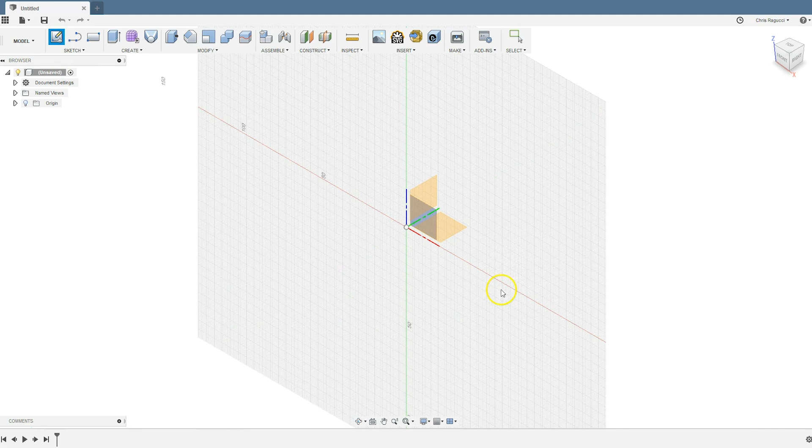Here we are in Fusion 360 once again. We're going to start off like I start everything else, with a sketch. I'm going to click on Create Sketch, and on the XY plane, here we go.

Now I'll show you a tool I haven't shown in this series. I'm going to hit the S key on my keyboard, which brings up my sketch shortcut menu. I've already added things I use frequently, like line, rectangle, circle, center rectangle, patterns, sketch fillets, and points. If you want to add things you use frequently, you can just search for anything if you don't know where it is.

If I wanted to add shell, since that's a feature we're going to use, I just type in shell and add it by clicking this little arrow. Now whenever I hit the S key, it will bring up shell, so I don't have to go up and hit Modify. With me? Okay, here we go.

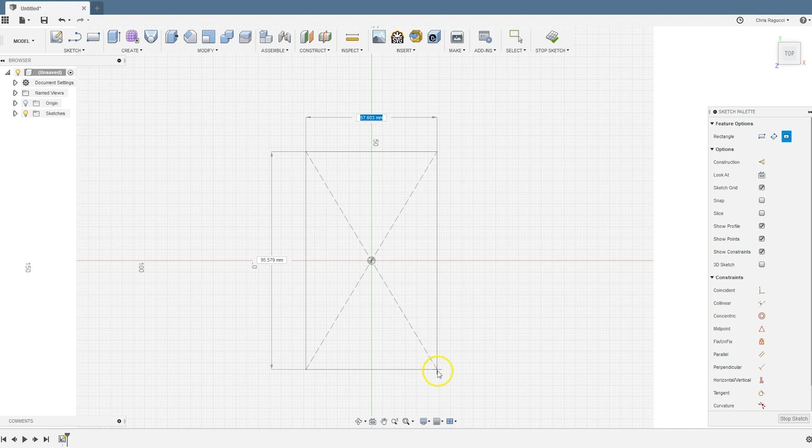First we're going to start with a center rectangle. I'm going to click and drag out, and I want this to be 100 by 150 -- that wasn't a 50, that was a 0. Here we go, now we have a rectangle. Very simply, I'm going to stop the sketch.

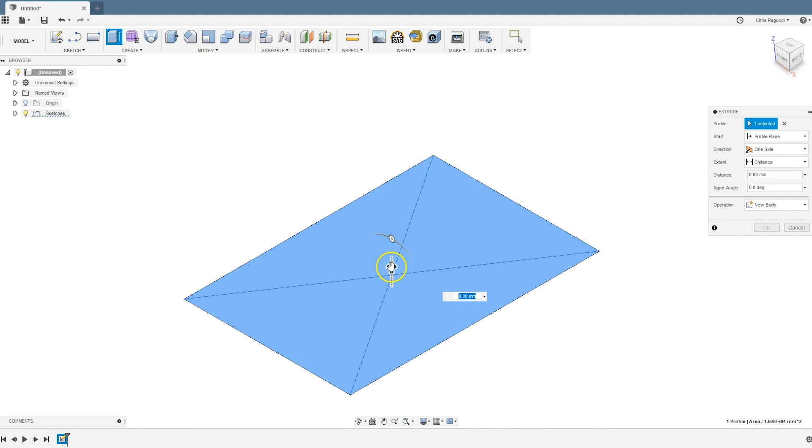Now I'm going to extrude this. I'll hit E, click on the profile, and drag it up. I want this to be 75 millimeters, and hit enter. I'm going to move a little faster since I'm hoping you're getting the hang of it by now. So now this is just the basic shape for our bin.

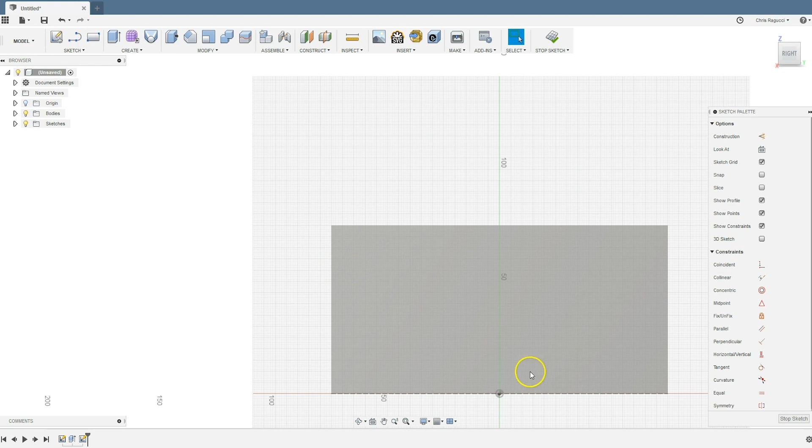What I'm going to do is add another sketch. I'll click on this profile right here and click Add Sketch. First I'm going to project this square or rectangle, so P for project, click on that and hit OK. That's all I need there.

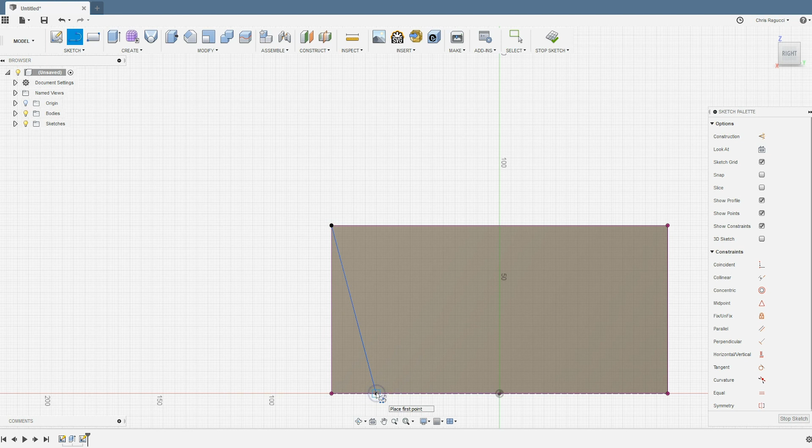And I'm going to draw one more line. L for line. I'll start at this top corner and drag down, and I want this angle to be somewhere around 75. That's fine, hit escape, and I'm done. Now we have two separate profiles. I'm going to stop the sketch and go back to the home view.

So now here's that profile I just created. I'm going to click on it and hit E for extrude. If we wanted to extrude, we'd go this way, but I want to cut, so we're going to go this way. I could just do this and cut all the way through it, but that's not how I want it, because if I decide later to make it wider or thinner, whatever dimension I tell this to be, that's all it would be.

So if I made this cut like this, and then said, geez, I really wanted to make this wider, if I went back and changed the sketch to make it wider, this cut would only be this deep.

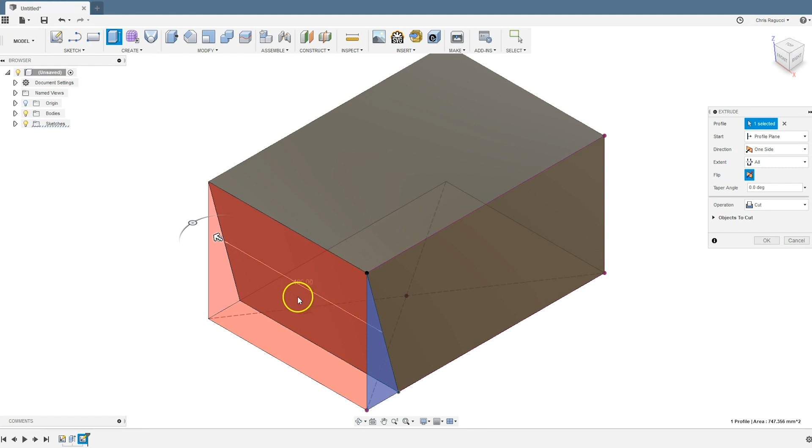So we don't want that. What we're going to do is go up to extent, and instead of changing distance, we're going to hit to all. Now no matter what I do, if I change this first sketch and make it wider or narrower, this will always cut the entire piece. We're good there, so now we can hide that sketch because we don't need it anymore.

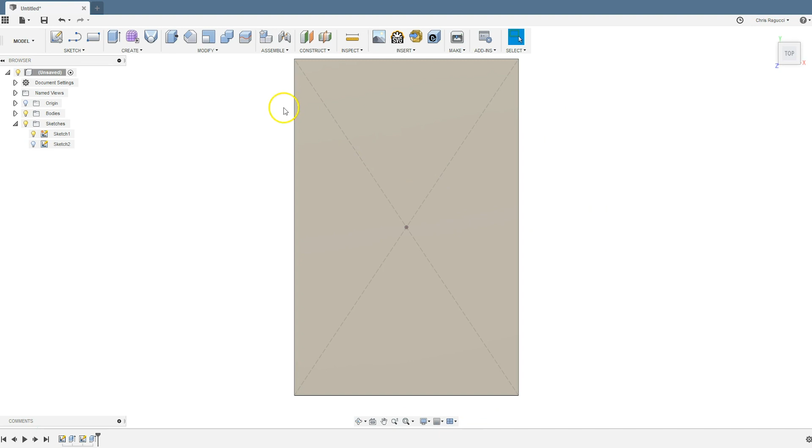Now we're going to use a couple of cool features. I'm going to look at the top here, and I want to use that shell command. Go to modify, shell. I'm going to hit that top face, and this is going to make a shell, and we're going to make that 3 millimeters thick. So now all of these 4 walls and the floor are all 3 millimeters thick. With me so far? Great.

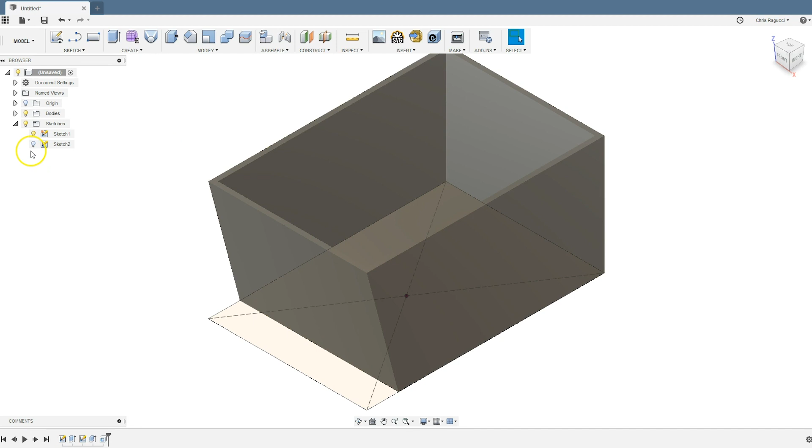Let's keep going. Now I'm going to create another sketch. I'm going to hide this body for a second, and I don't need to see that first sketch anymore, so I'll keep those 2 sketches hidden. I'm going to create a new sketch on that same XY plane, and now bring that body back in.

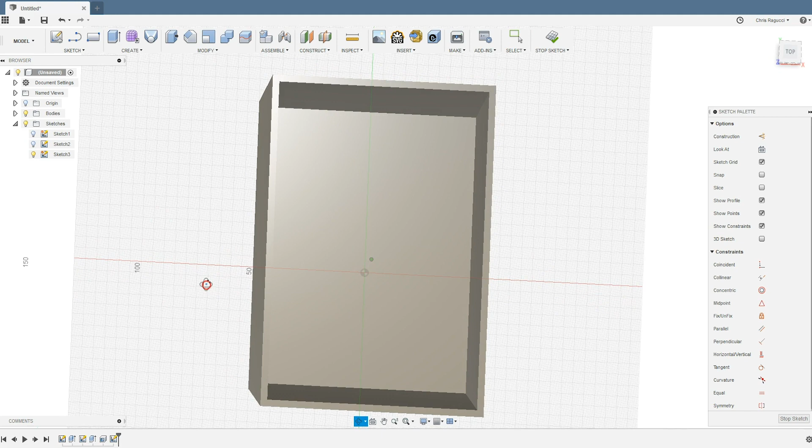I need to project some of these parts, so I'm going to hit P for project. I want this bottom rectangle, and I want these outside lines here. Now you can see we've got those.

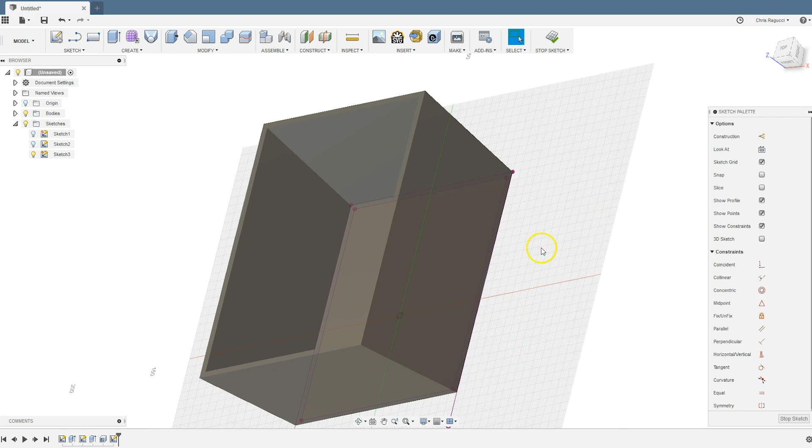Now we're going to have a little bit of fun. I'm going to hide the bodies again, and here's our sketch. The first thing we're going to do is extend these. I'm going to hit S and go to extend, which I use frequently. I'm going to extend this over here, but it's not letting me, so I'm just going to draw a line. L for line, click, drag, click, drag. Now these are closed profiles.

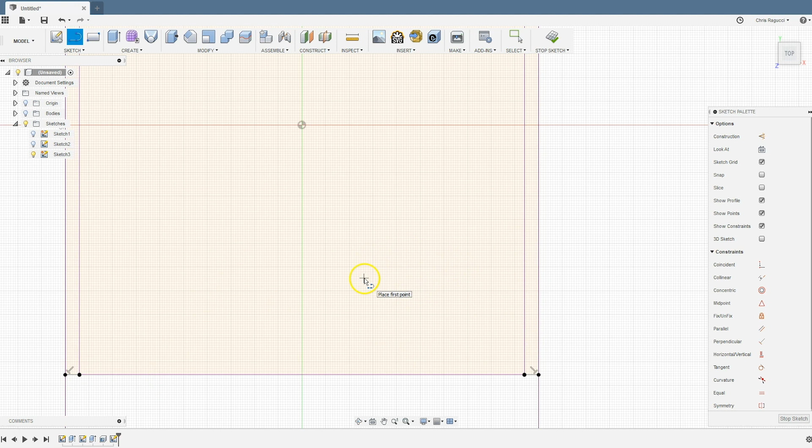Now I'm going to offset these. O for offset. I'm going to click on this, and I want this to be 3 millimeters. I also want to extend these out to that line there. Now I'm going to bring that body back in just so you can kind of see where we're at here. So now we've got that outer line there.

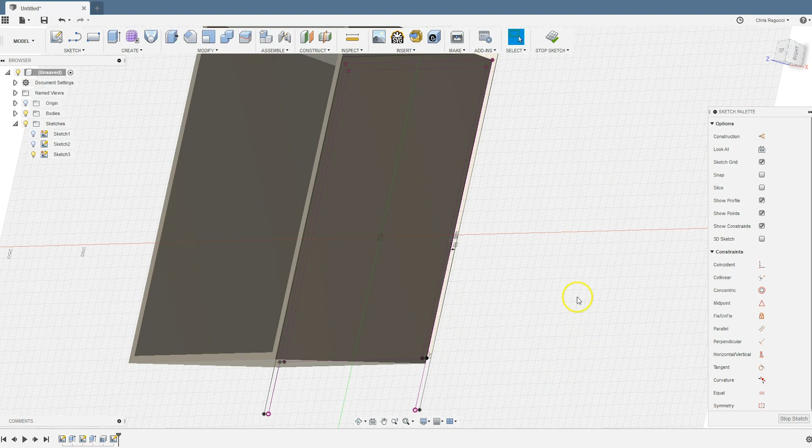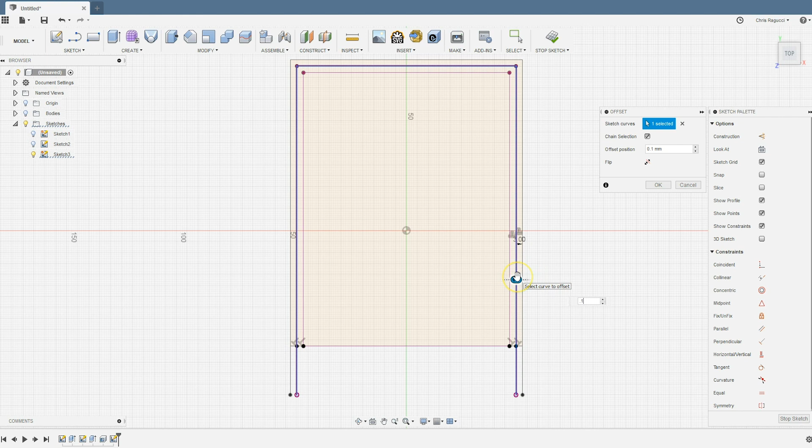Now we've got some tricks that are about to happen. One more thing we need to do is hide that body again. We need to make one more offset, so we need to offset this center one. We only need to offset that 0.1 because this is going to be our tolerance.

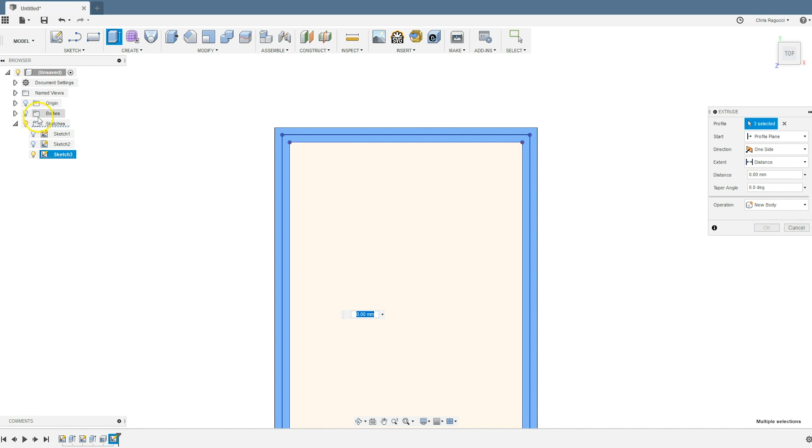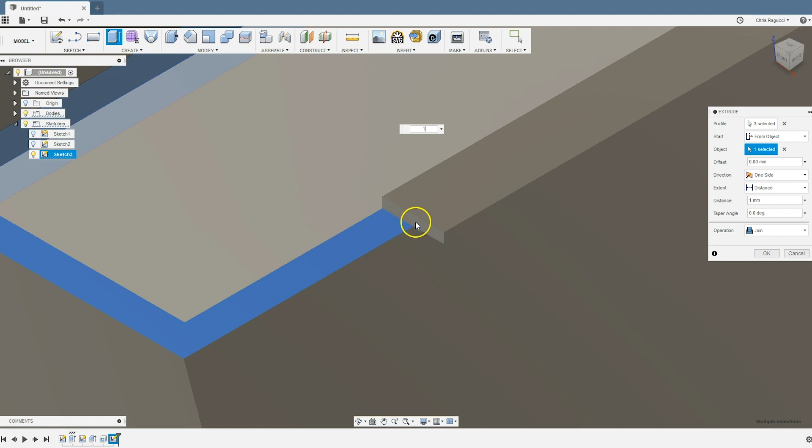Now we're going to stop the sketch and click E for extrude, and click on this center one, and this one. So we now have all of those set up. Now we're going to bring that body back in, and say start from object, and click right here. Now we're going to extrude that just 1 millimeter. You see what that does? That's actually adding a lip from the inner part here going out to the end. That's exactly what we want.

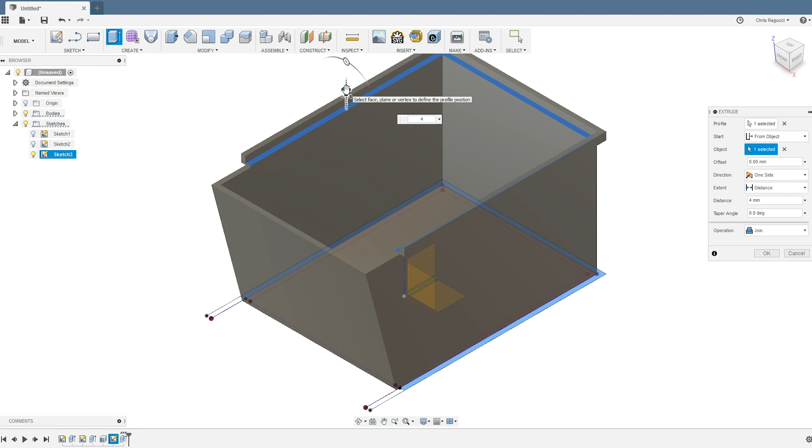Now we're going to hit E for extrude again. We're going to click on just the outer line. Same thing, we're going to start it from an object. We're going to click on this top section here, and extrude that 4 more. So now that's 5 millimeters tall total. What's going to happen is, if you can see what I'm doing here, this is cut out for this corner down here. It doesn't need to go all the way to the end, just right here.

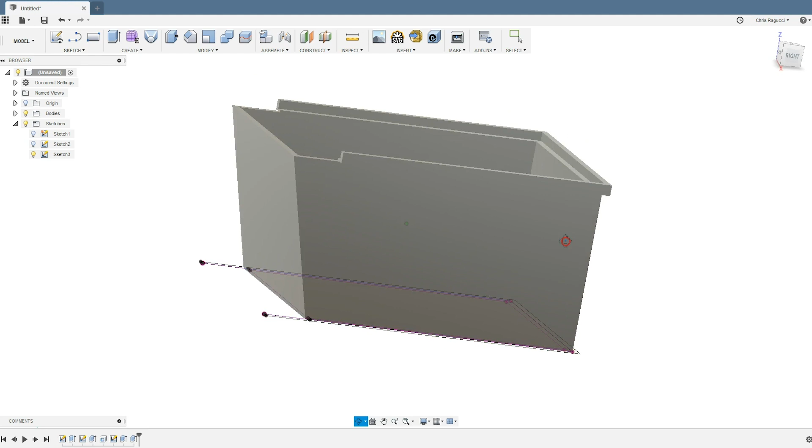Okay, so now this is a very basic stackable bin. Now, you're probably going to want to be able to get your hand in there just a little bit anyway.

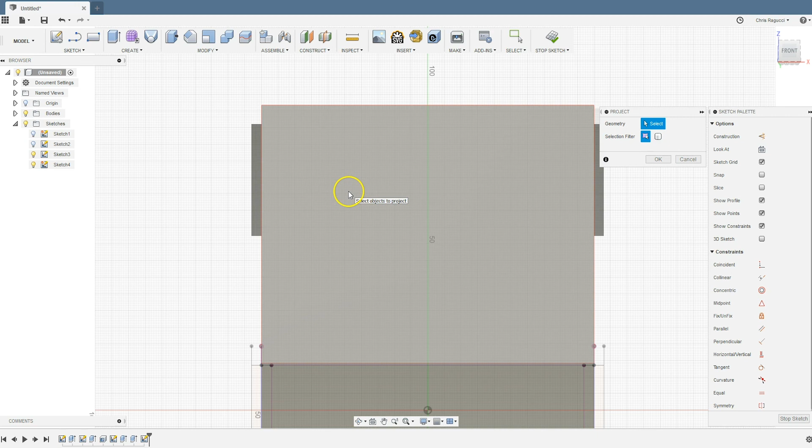So what we're going to do here is create another sketch. I'm going to click create sketch, and click on this profile. You see how it angles me up a little bit. So all I'm really going to do is project, P, and click on this. Now I have the basic face there.

Now I'm going to hit L for line. I'm going to move along here until I get my triangle so I know I'm smack in the middle, and draw a line straight down. Then I'll hit escape, click on that line and click X, or I could click on construction here, either one.

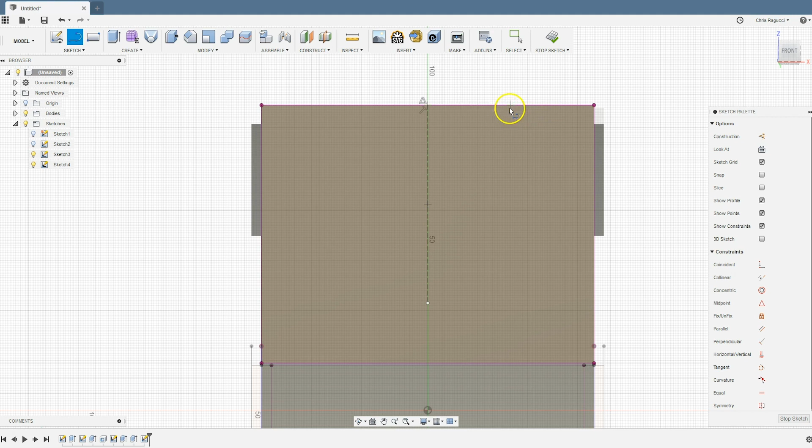Okay, then I'm going to draw a line. Let's say from here, we'll go down around here, and then right over that center. Okay, and that's it. Now we're going to use the mirror function.

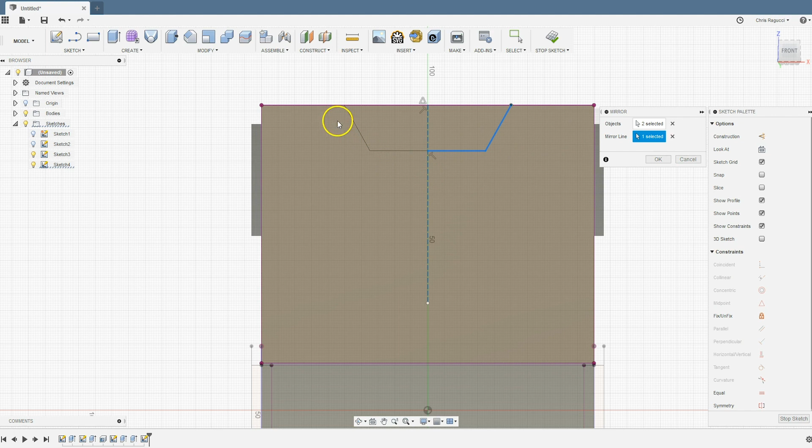So I'm going to click S, and use mirror because I have it in my shortcuts. I'm going to click on this line and this line, and select the mirror line, which is this dotted line, and now it's over there too. Then I'm going to stop the sketch.

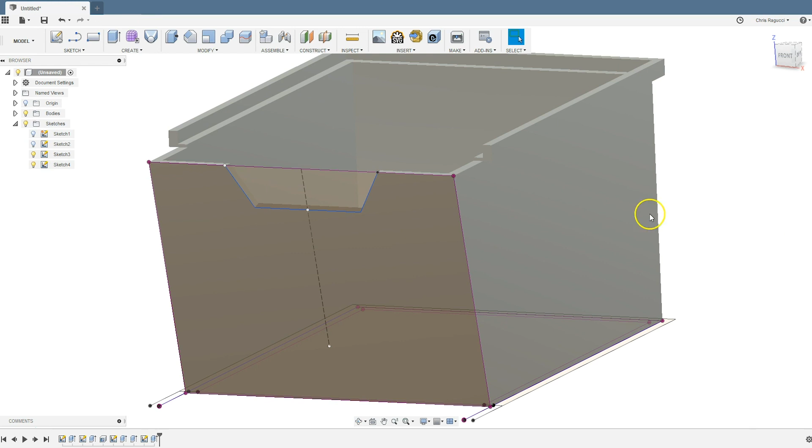Now I'm going to hit extrude, click on that profile, move it back, and I could go all the way back this way if I wanted to, or extend to all. And now that will cut out that whole section. Hide those sketches, and now you can see it.

So we're pausing here for a second because I wanted to tell you about something I may have shown in another video. I don't remember, but I'm going to show you coming up right here—a simple way to strengthen parts like this. We're going to be adding some fillets, and you can follow along in the screencast. But it makes something that could be a little bit weaker if it's not a super thick part.

We only do these at 3 millimeters thick. If you were going to do it at 5 millimeters or even thicker, a centimeter, you wouldn't have to worry about it so much. But in a case like this, where something's small and kind of fragile, you really want to see how you can beef up your inner corners. So I'm going to show you how to do that right now.

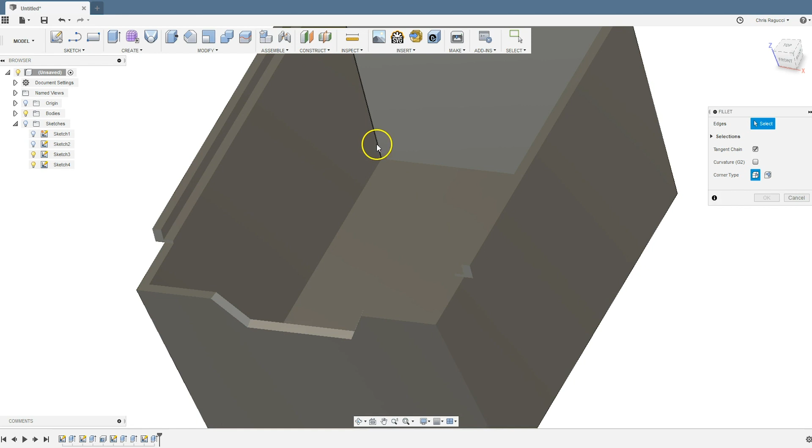So what we're going to do is add some fillets. We're going to hit F for fillet, and click on these interior lines here. Okay, so we want all those.

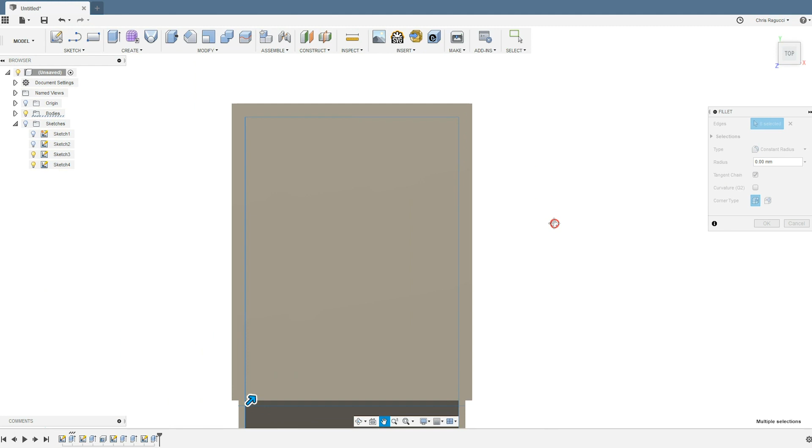Then we are going to move that in, and I'm going to say 3. So you see what that did? It rounded these inner edges, so it's just going to make them a little bit stronger. That's all we want right there.

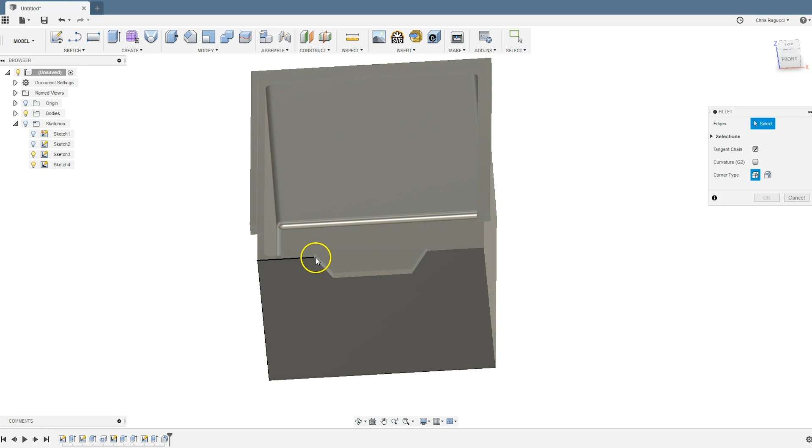And then if we want to do the same thing, F for fillet, we can just add some fillets here to make it a little bit more smooth. And we'll do that there.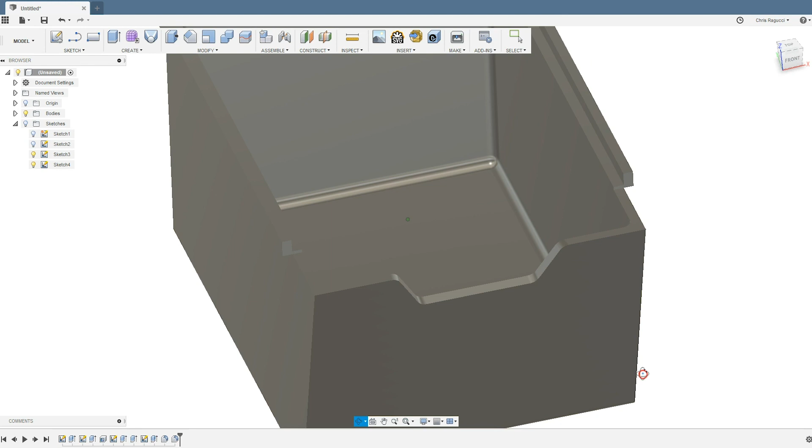And that's really it. So a second box will stack on top of this. It will sit right here in this ridge here, and this fillet here just gives it that little bit of extra space to sit on.

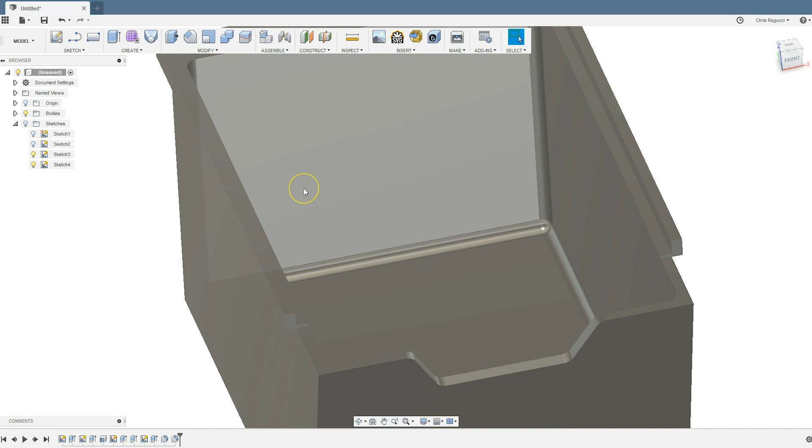So pretty cool, huh? If you wanted to, you could make little supports that go inside here that run up just a little bit on the sides and the back. I don't think it's really necessary for the demonstration, but take it where you want to take it. This is your design, not mine.

So I think we're good to go here. Let's go print it. So I'm going to hit make, click on it, and send it right to Simplify3D.

And today we're going to use Ultra Magnus. Ultra Magnus is a standard CR10 with, what do I have on him? He's got an E3D V6 hot end.

So we're going to center and arrange this. But now, for what we're doing, this is just a demonstration. I'm not going to print this full size. So I'm going to double click and scale this down to, let's say, 70%.

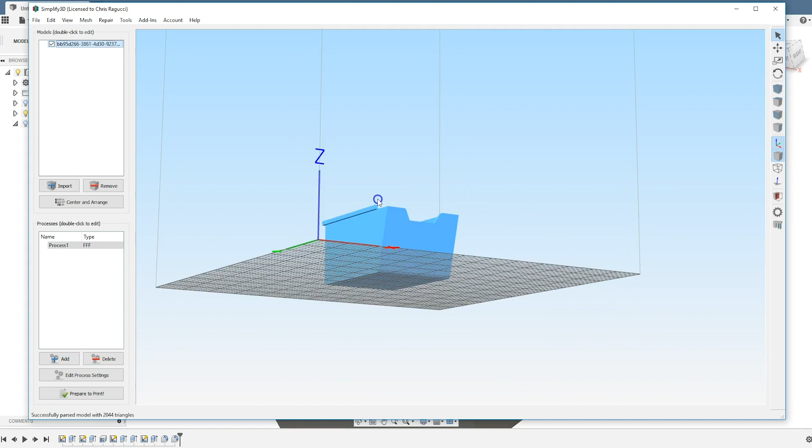Then we're going to add some supports because even on my best day, bridging will not bridge this entire distance. So we need to have some support. I'm just going to click on the support tab and generate some automatic supports. We'll say at 45 degrees, and we'll generate them. Where are they?

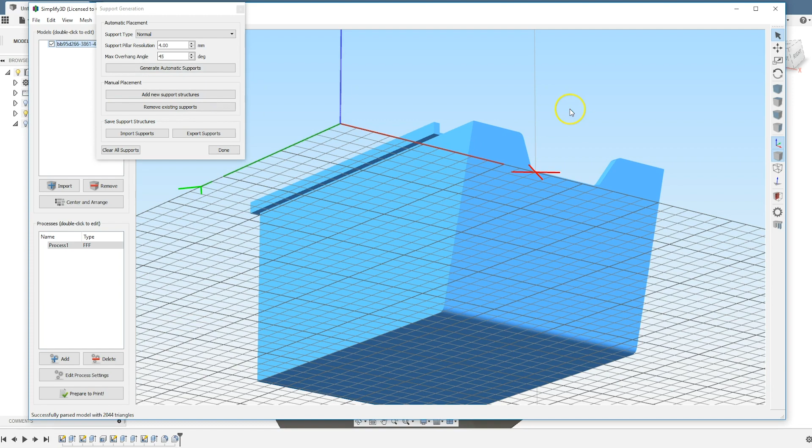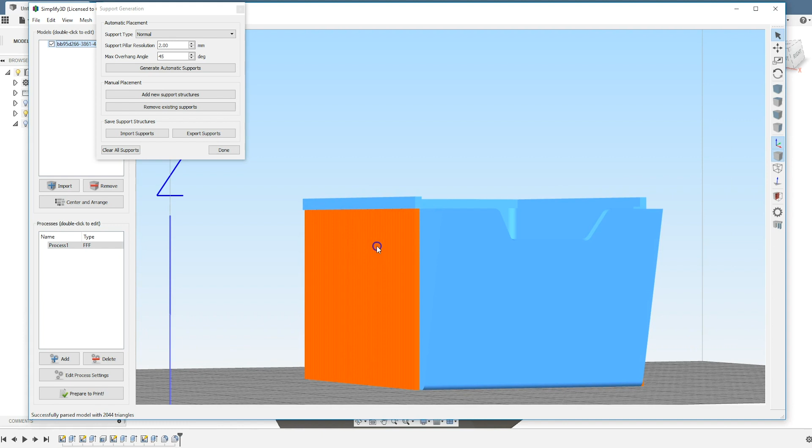Let's make them smaller. There we go, they need to be pretty small for this. All right, so that's going to support this lip as it prints.

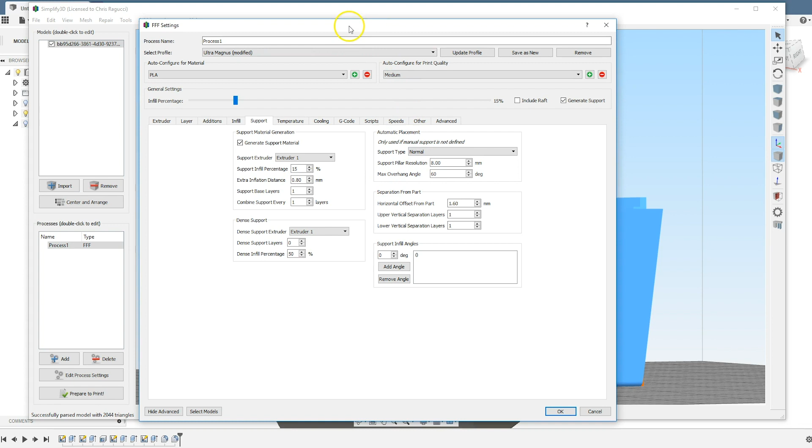So we're done, now we're going to prepare. We're going to go back to the process. I'm going to show you something that I did here. Within the supports tab, I added inflation distance. This will make the supports print outside the area of the print or the model. So what's going to happen is, I can't show you yet. We'll move over here. You see how this stops before the end? It's going to actually extend the supports out further, so that will really support that.

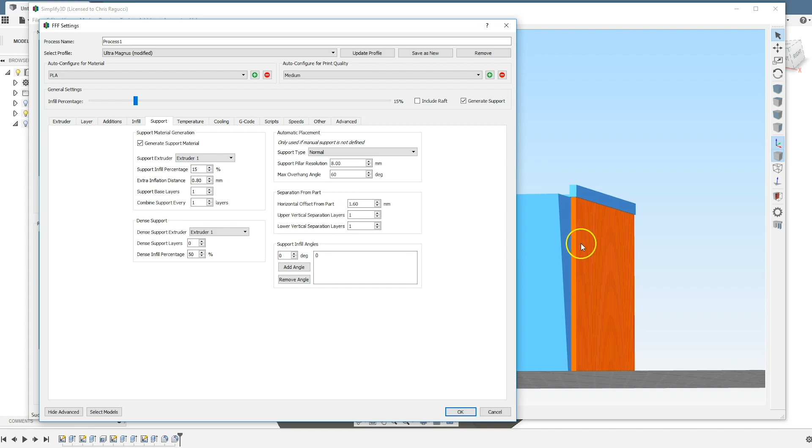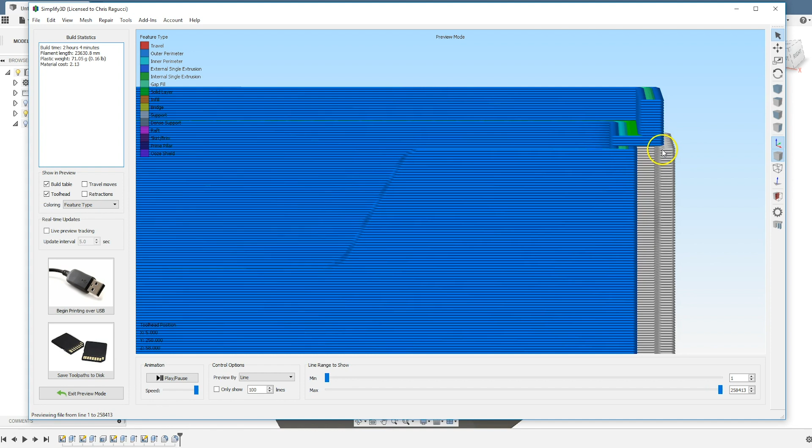And then also what I did is I set the horizontal offset, so that means this is going to stay 1.6 millimeters away from this wall. That way you won't have a hard time getting the supports off. So when I prepare to print this, you can see my supports extend out beyond the wall here. I also have one layer of vertical separation, so they extend out. I don't want them anywhere near this wall, I just want them to hold this part up.

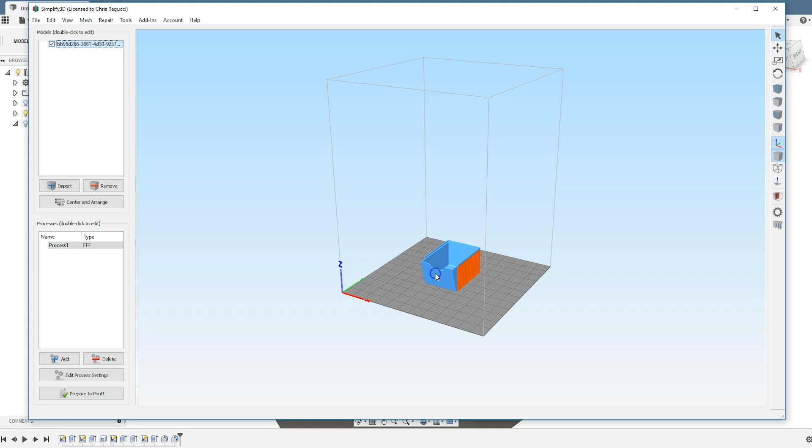See how that is? All right, so let's back out and let's make another one so we can stack them. I'm going to duplicate, make one more, and yes, I do want to add my supports. And then we'll just center and arrange that. So now it will print two.

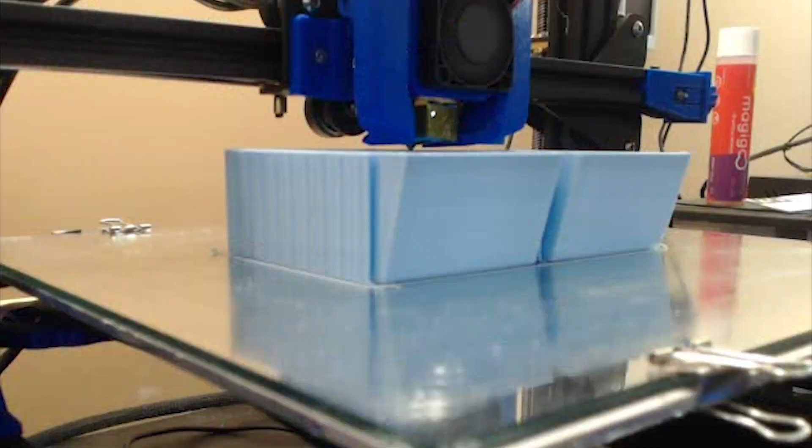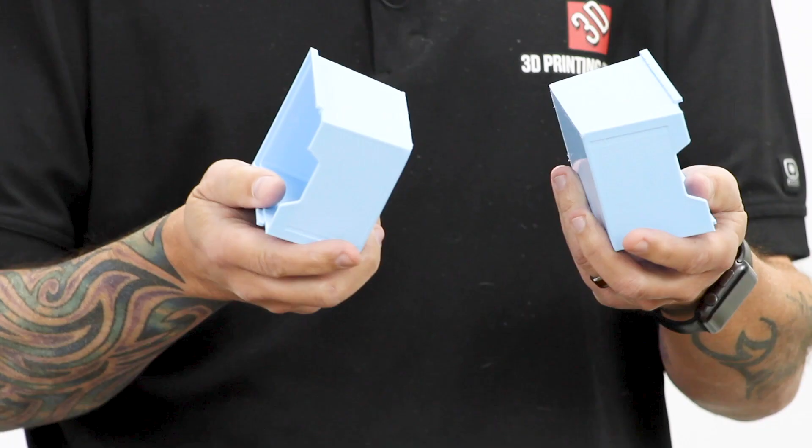All right, and here we are. Two light blue stacking bins. And look, they actually stack. I can make an infomercial. Pretty cool. Wait, infomercial? But wait, there's more.

I made two more, and I did these in our value black, actually. And what I did is I left the supports on this one particularly so you could see how easy it was to pull them off. So you saw in the video how I did it. Now watch this. That easy.

Same thing. Now there is a time lapse for this that we're going to show you in one second. Something really cool about this time lapse, I used another one of my printers. It's a T-Rex 2 Plus. It's a very cool printer because it's what's called an IDEX machine, an independent dual extruder. It actually has two separate extruders on two separate pulleys, and two separate stepper motors. So they move completely independent of each other, or they will work simultaneously together. So what I did is I did what's called ditto mode or duplicate mode. Well, just watch the video, you'll see how it happens.

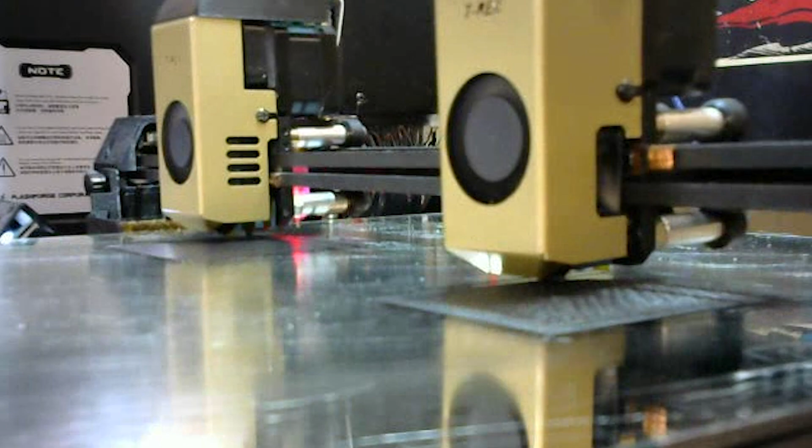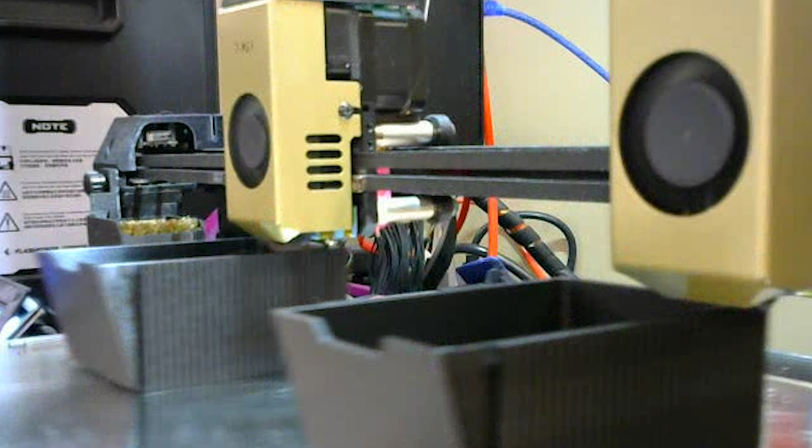So now you know how something like that works. Pretty cool, huh? So anyway, here we are, they stack. They even stack with each other, usually. Another thing that I figure I will just mention, you'll notice that the black ones are actually quite a bit smoother than the blue ones.

Nozzle size, I didn't change the layer height. They're all printed at 0.2 millimeters, but this is a 0.4 millimeter nozzle, and these were a 0.6. So you can see there's just a slight difference in the quality. And there you have it.

Stackable tray, guys. Pretty easy. You can do this. I have faith in you.